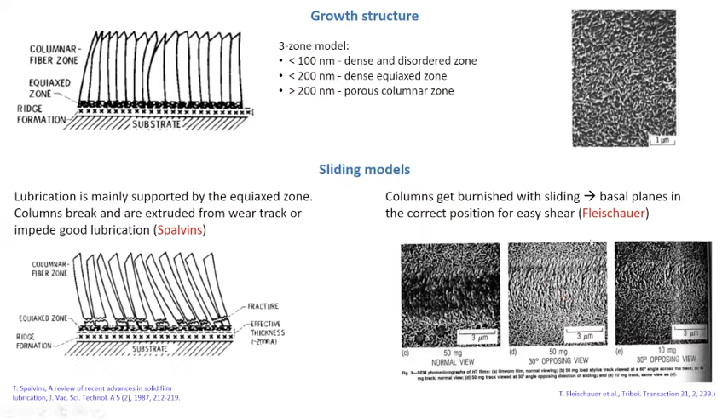Finally, we have another important issue related to MoS2: its failure in presence of humidity. Here again we have two hypotheses—I'll call them the old one and the novel one.

The old hypothesis proposes that the presence of humidity induces oxidation of the material, in particular the generation of MoO3, which is an abrasive material, and the generation of these oxides induces progressive failure of the coatings in presence of humidity.

But other researchers, around the middle of the 20th century, proposed another explanation, because they observed that the coefficient of friction slightly decreases as the temperature of the substrate increases.

They explained this experimental evidence by supposing that water molecules can physisorb and diffuse into the bulk, sticking to the edges of the basal planes, and so impeding the lamellar easy shear.

Actually, there is no consensus related to these two hypotheses. Somebody states that it's the oxidation that induces the failure of MoS2; others state that it's the physisorption of water molecules.

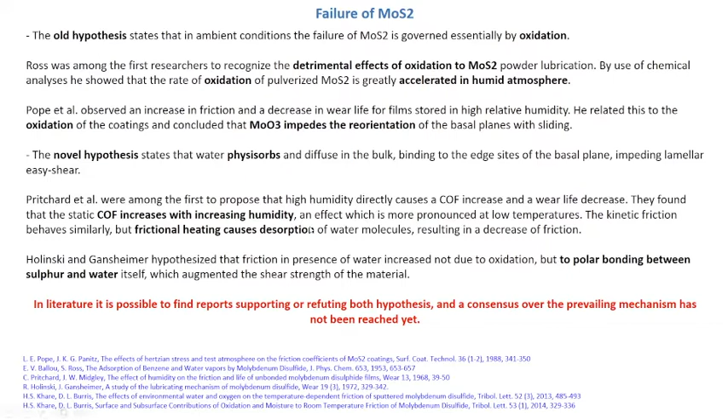So our intent is to understand more about the fundamental mechanisms related to the friction properties of MoS2, and in order to do that, we deposited very thin films of MoS2 on a single crystal.

We chose to deposit 200 nanometers of MoS2 in order to avoid the growth of the columnar structure, so we could see whether it is effectively the presence of the equiaxed zone that supports lubrication, or the presence of the columnar structure.

We also wanted to clarify the role of water physisorption, to see whether it is physisorption or oxidation that induces the failure of MoS2.

We selected silicon as a substrate because, in the form of a single crystal, it presents a very flat surface, so we can avoid the effect of surface morphology. In addition, silicon is not a contaminant of MoS2, so we can be sure there is no effect of the substrate on the chemical characteristics of the coating.

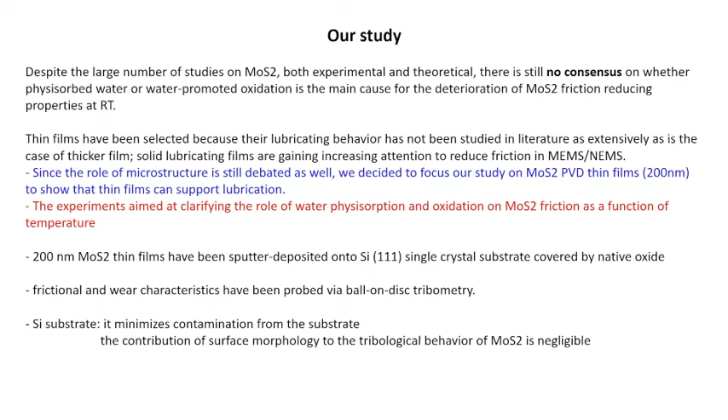Okay, in order to generate this film, we use the physical vapor deposition magnetron sputtering technique. Here you can see a sketch of the machine. The material is deposited in a vacuum chamber where you have the target, which is composed by MoS2, and the substrate in the top part of the chamber. Inducing a plasma and a sputtering of the plasma on the target, you have the generation of a flux of molybdenum and sulfur atoms towards the substrate, and the condensation on the substrate generates the final film.

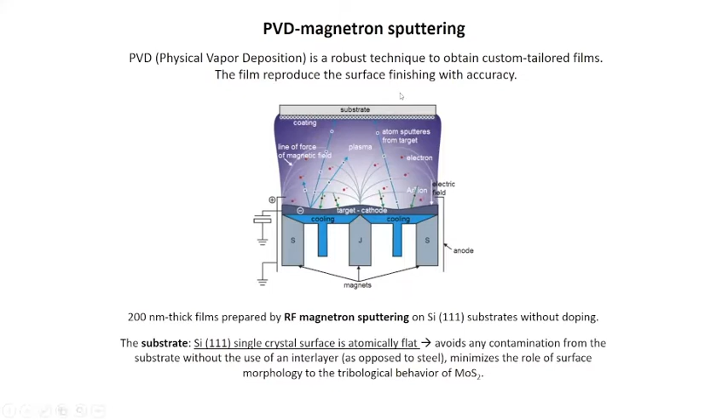Here you can see the appearance of the coating that we have made. In the top view, you can see that there are no evidence of needle-like structures, and this is evident from the top, but also from the cross section. There are no evidence of columns, and so more or less we are in the so-called equiaxed zone.

By means of Auger spectroscopy, we also characterized the stoichiometry of the film, and looking at the table, you can find that the film is stoichiometric. We have a small amount of oxygen, which is related to partial oxygen inside the chamber, but looking at the chemical spectra from the Auger spectroscopy, we may say that oxygen in this case is residual oxygen inside the chamber.

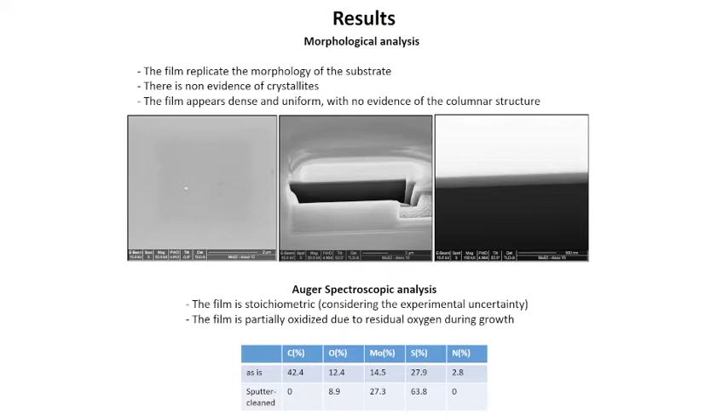Related to the tribological performances, we measured the coefficient of friction as a function of the sliding distance by means of a ball-on-disc tribometer. Here you can see the main characteristics of the test. I just want to highlight the fact that the counterbody is made of steel, 100 chromium 6 steel, and the ball has 4 millimeters in diameter.

The tests have been performed in 3 different conditions: humid air at room temperature, the green line; dry air at room temperature, meaning absence of humidity but presence of oxygen, which is this light blue; and absence of humidity and absence of oxygen, so in nitrogen atmosphere at room temperature. Finally, we also tested in humid atmosphere, but at a slightly higher temperature with respect to room temperature.

The results show that if you do the measurements in humid air, you have a coefficient of friction which is around 0.15, and the failure is reached at about 10-12 kilocycles. When you move to dry air, you have a very important decrease of the coefficient of friction, now around 0.05, 0.07, and the failure in this case has been reached at about 15 kilocycles.

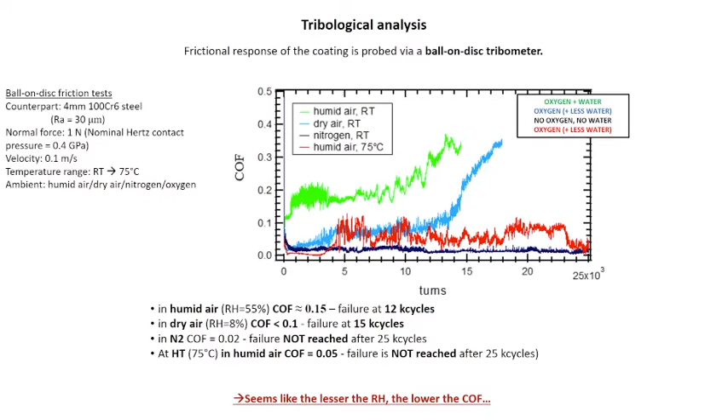In order to deepen these aspects, we repeated similar experiments. In this case, we checked the coefficient of friction and also the appearance of the ball counterbody at different temperatures. So we start at room temperature, we move to 40 degrees, 55 degrees, 75, and then back to 55, 40, and room temperature. So we did a cycle in terms of the temperature of the coating.

What you can see is that the coefficient of friction started at 0.1, and then it drops to 0.01, 0.02 at the higher temperature. Then we restore again the initial value of the coefficient of friction when we go back to room temperature. More or less the same results can be observed qualitatively if you look at the ball counterbody, because at room temperature you have a very large amount of debris on the counterbody.

The debris disappears as soon as we heat the substrate, at 40, 55, 75 degrees. And when you go back to room temperature, again we found this very big amount of debris. This means that the process of heating the substrate induces a reversible process.

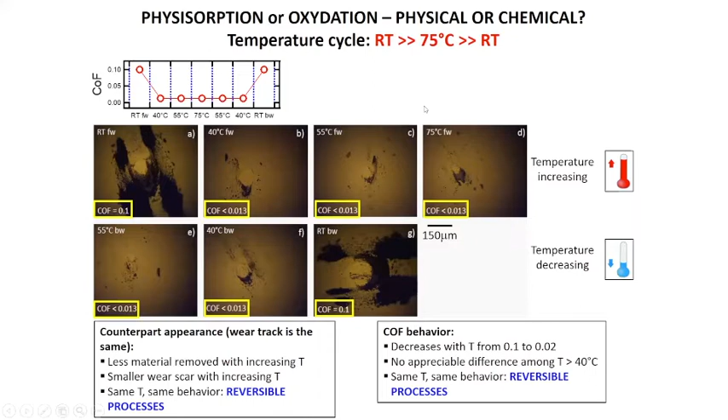So still we are supporting the thesis of water physisorption and not oxidation of the coating. But the final test, which represents more or less the smoking gun about this topic, is what we call the pump and purge experiment. So we measure again the coefficient of friction as a function of the cycle time.

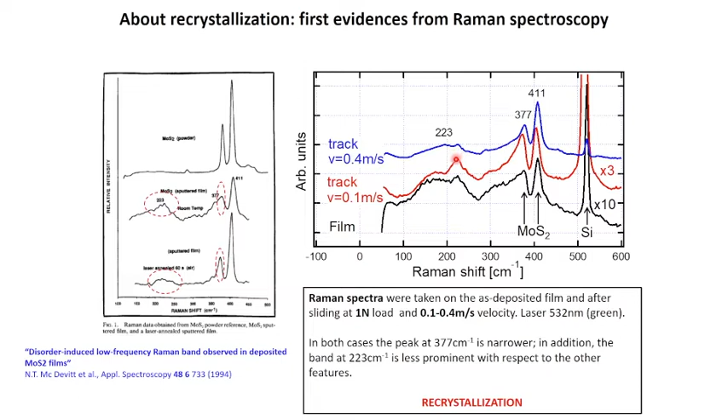In the case of 0.4 meter per second, we also observe a decrease in the broad feature related to 223. This is the first evidence of recrystallization of the coating, which probably has a role in the performance of the material.

Again, still using Raman analysis, we want to deepen the aspects related to the measurement in air with respect to the measurement in vacuum. Here I reported the images you have already seen related to the measurement in air at 1 Newton load, where you can see the presence of debris. These debris are really not adherent to the substrate, because gently cleaning the surface, you can see the complete removal of this debris.

Before cleaning the counterbody, we perform a Raman analysis on this region where the debris are present and on the wear scar. What we obtain is reported in this graph, where the green spectrum corresponds to the region with the presence of debris, while the blue spectrum represents the analysis on the wear scar, in the middle of the wear scar.

As you can see, the debris are composed of molybdenum disulfide, where there is no evidence of the oxidized layer, which has a feature around 800 centimeters to the -1. It is possible to see the generation of the debris if we irradiate with a higher power in the Raman analysis, because in this case you can see the growing of this new structure, which is related to the oxidation of the coating.

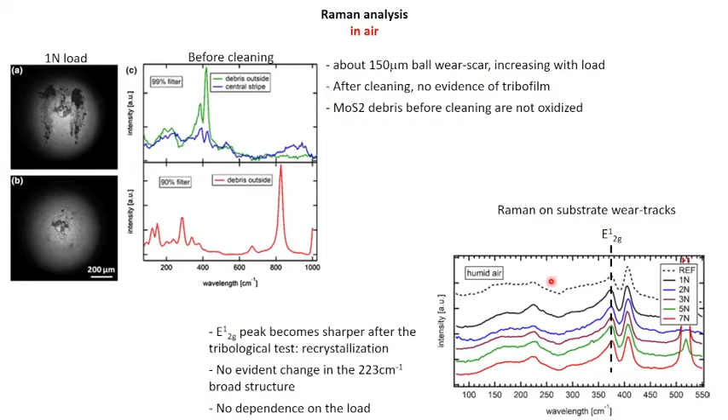Repeating the same analysis in vacuum, even before cleaning the surface, we do not have any evidence of debris on the surface, but we can observe the presence in the wear scar of a dark area. Doing the Raman analysis on this black part, using the higher power that on the debris generates oxidation, you can clearly see that here in red we have the presence of the MoS2 film. So we have the generation of a tribofilm composed of molybdenum disulfide, which is probably the reason for the low coefficient of friction experienced in vacuum or in absence of humidity.

Again, we analyzed the order of the film, still analyzing this feature in the Raman spectra at different loads. Again, we found that this peak gets narrower, and also in this case we did not find any dependence on the load, but the recrystallization seems to be more effective in the case of measurement in vacuum with respect to the case of measurement in air condition. This probably contributes also to the best behavior that has been recorded in absence of humidity.

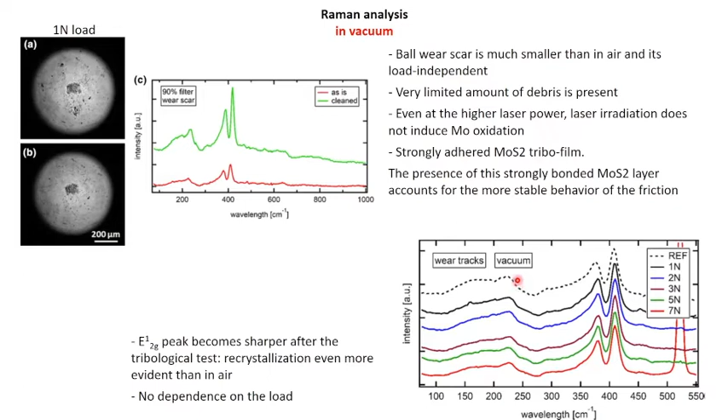Considering the results that we found at the macro scale, we wanted to deepen the aspects of the intrinsic friction mechanism. In order to do that, we have to move to the nanoscale. So we measure again the tribological properties, but applying lower load and with smaller contacts, our area of contact.

So we use AFM. In order to study the role of order and disorder of the coating, we select two different samples. One is the crystalline MoS2, the mineral molybdenite, and the other is a quasi-amorphous MoS2, our polycrystalline coating.

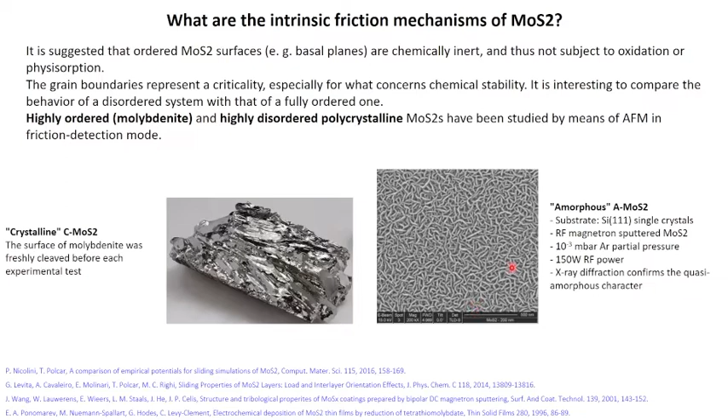In order to measure the tribological properties, we use AFM, but as we saw, the best performances have been found if the two surfaces that slide are both made of MoS2. In order to have this condition again, we cover standard AFM tips with 100 nanometer MoS2 by means of PVD. Here you can see the AFM tip covered by MoS2, where you can clearly recognize the needle-like structure.

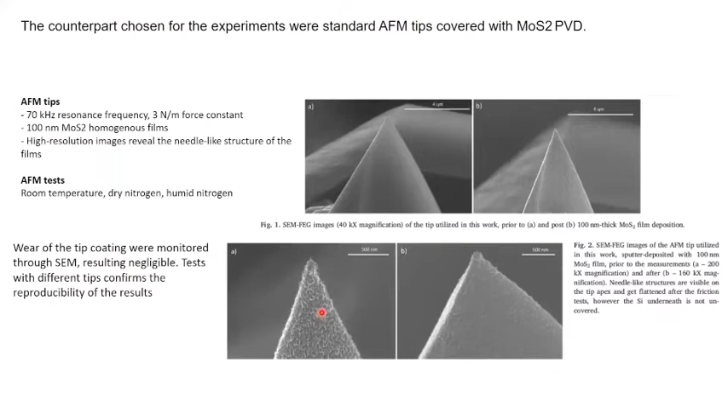So we use this kind of tip and we measure the coefficient of friction. In order to do that with AFM, what you have to do is measure the lateral force as a function of the load. Of course, the slope of the resulting curve represents the coefficient of friction.

So we did this experiment for amorphous coupling, our tip against the polycrystalline film, and in the case of amorphous-crystal coupling, our tip against the molybdenite. We did the experiments in absence of humidity, the red curve here, and in presence of humidity, the blue curve. The results after averaging all the data are reported in the table.

In the case of amorphous coupling, the coefficient of friction in dry condition is 0.41, and in humid condition is 0.58. This is more or less similar to the trend we found at the macro scale, but very different in terms of absolute value. In particular, the difference from dry to humid condition is very different, but this is probably related to the fact that from the macroscale to the nanoscale there are many differences related to the materials, the different load applied, the different area of contact, and others. These are probably the reasons for the different behavior at the nano and macro scale.

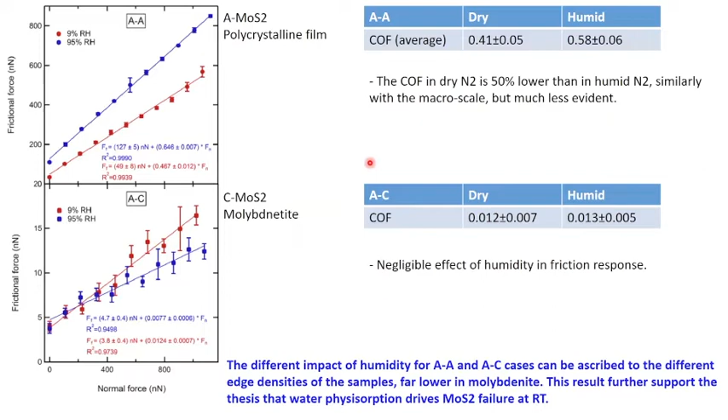In order to better understand the physical mechanism, we also performed an MD simulation thanks to the collaboration with the group of Professor Polcar at the University of Prague. I'm not really an expert in molecular dynamics simulation, so I don't want to go too much into detail on these aspects.

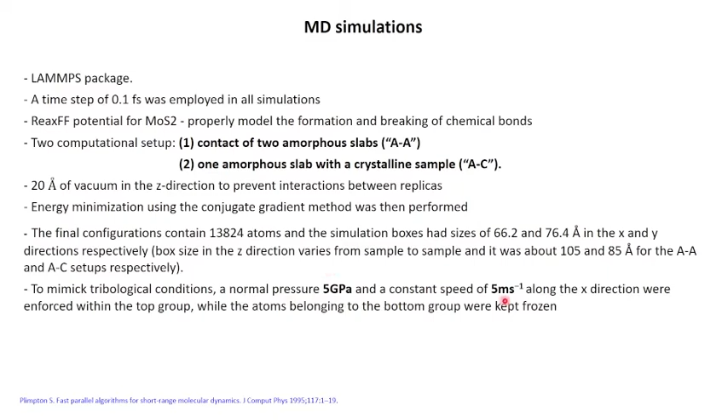I just want to highlight that the MD simulations were done using the contact of two amorphous slabs for the amorphous coupling case, and an amorphous slab versus a crystalline sample for the amorphous-crystal coupling case. The load applied was 5 gigapascals, and the velocity was 5 meters per second.

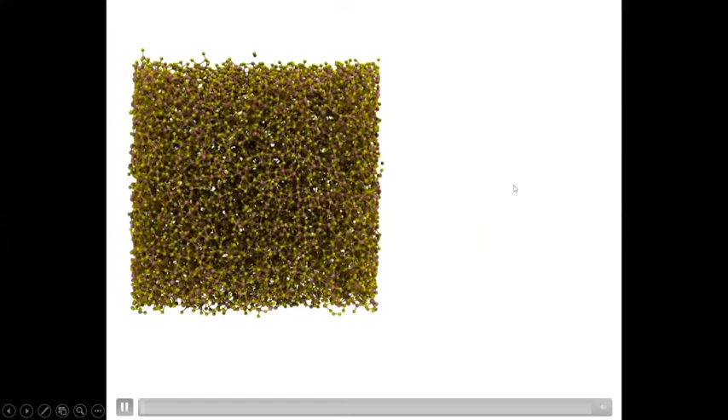If we look at this video here, this is for amorphous coupling. You can see that the application of the force only generates deformation of the structure, and of course this means that the coefficient of friction is far higher compared to the other case.

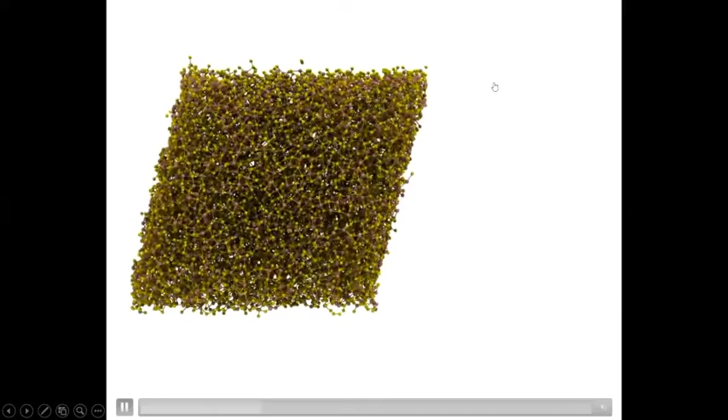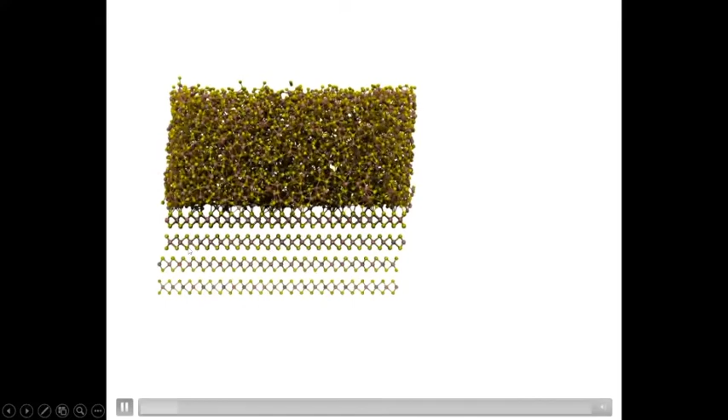If we move to the other video here, you can see there is the stick-slip, in this case of the second plane with respect to the third. And again we have another slip event of the first layer with respect to the second, and so on and so forth.

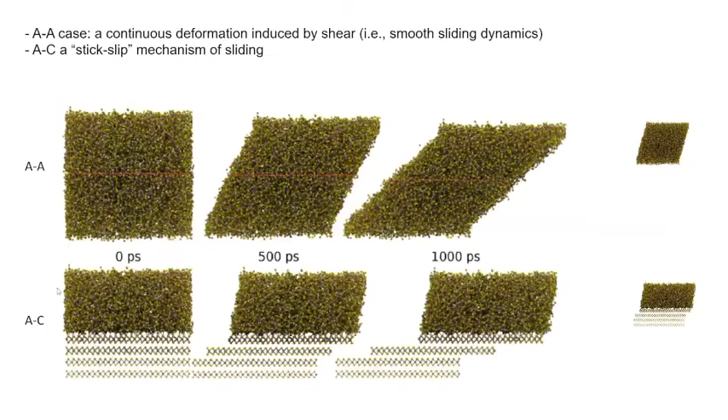So also in the case of the simulation, we can generate this frictional force as a function of the load, and again we can calculate the coefficient of friction in the simulation for the amorphous and amorphous-crystal cases.

In this case, we are only able to do this in dry conditions, in the absence of humidity. The comparison with the experiments shows that for amorphous coupling, we have a perfect agreement between simulation and experiments. For amorphous-crystal pairing, the coefficient of friction is again lower than for amorphous, even though the difference with respect to the experiments is much higher as well.

So in order to understand this, we have to make some considerations. Regarding the difference in the coefficient of friction between dry and humid atmosphere, I've already told you this is related to the very different experiments. And regarding the difference in the coefficient of friction between, let's say, dry nitrogen in the single crystal case, we have to consider that in crystal coupling, during sliding the process is only related to overcoming the van der Waals forces.

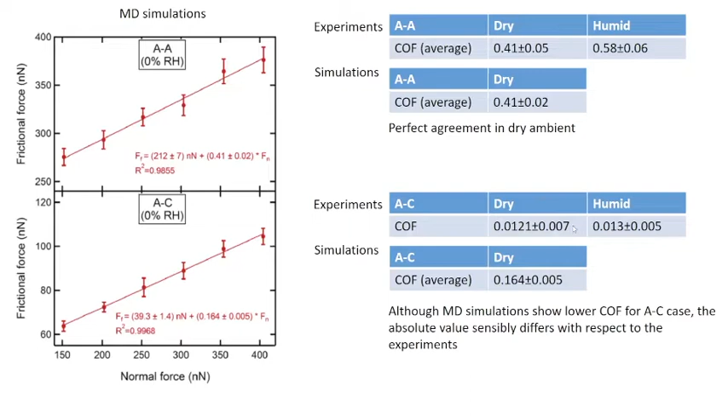Regarding the difference between these values, this has been ascribed to the fact that in the molecular dynamics simulation, the model assumes commensuration between the sliding planes. So this is the most dissipative scenario, which is not the case in the experiments, since we cannot control exactly the orientation of the crystal.

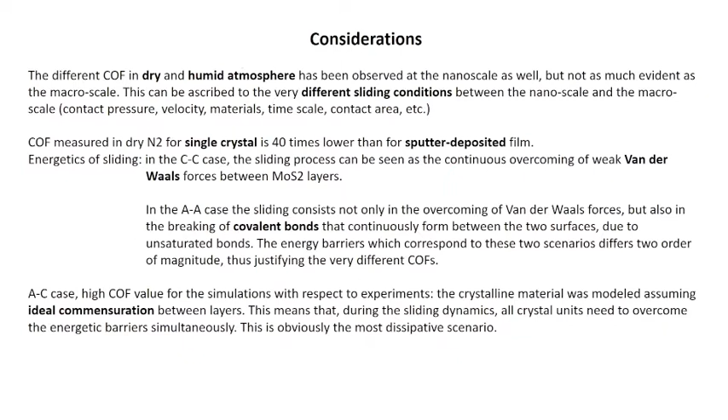Okay, let's do some general considerations related to the work on this particular system.

What I showed you is that 200 nanometer films are able to support lubrication despite the absence of the columnar structure, and this, in a way, supports the sliding model from Spalvins.

Heating to a temperature sufficient to induce water desorption, you can have very good tribological performance even in the presence of humidity. This suggests that oxidation is not the main origin of MoS2 failure.

This has also been proved by measuring the coefficient of friction in saturation of oxygen, which shows that even if oxygen is always present in the ambient, we do not get worse tribological performance of MoS2.

We also found that in the absence of humidity, we have the generation of a tribofilm which is very strongly adhered to the surface, and this is probably the reason why, in absence of humidity, we have this very good tribological performance of MoS2.

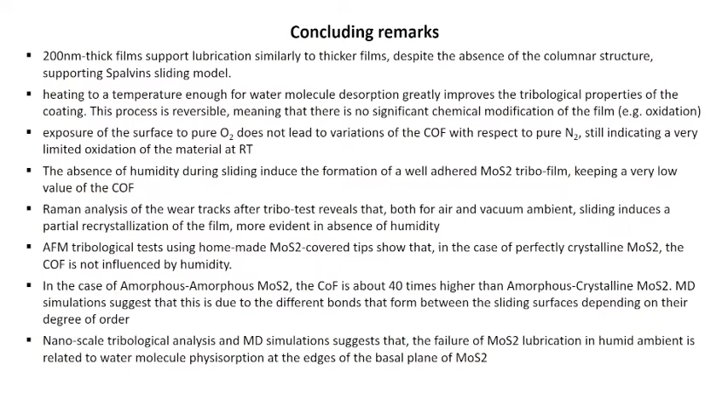Finally, I would like to thank some people. First of all, Dr. Elisabetta Serpini, who is the main author of this work related to MoS2, and the group of Professor Polcar at the University of Prague for the productive collaboration on MD simulation and many other issues related to these aspects.

For those who want to deepen their understanding of these issues, you can look at this publication from our group and the group in Prague, where you can see in more detail what I have already shown. And of course, thank you for the attention.

Thank you very much for the presentation. I think it was very complete, starting with the basics of the theories related to MoS2, going over a lot of experimental insights, and then closing with molecular dynamic simulations. It was not just a talk, it was a lesson to learn about MoS2—at least for me, I learned a couple of new things since I'm not working with MoS2.

So thank you very much for that. I think we have one question from the audience we can address right away: what is the example of amorphous and crystalline phase coupling? Can we call a 2D material amorphous and a ferrite phase crystalline?

So we have to find alternatives. This has been presented before in different research groups all over the world - there are a lot of people working in that field, a very fascinating field. The most promising or most famous candidates, as I said before, are MoS2, graphite as the traditional material, and of course tungsten disulfide, which has some advantages but also some drawbacks that I will discuss in a minute.

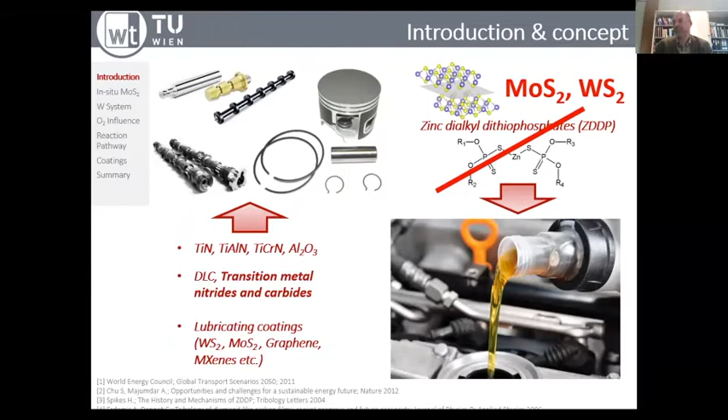If you think about how you can actually form these kinds of protective layers, there are different ways how you can apply that - sputtering techniques, PVD, CVD, different ways how you can actually apply MoS2 or WS2 to surfaces. One interesting aspect is whether you are able to form them in situ, under the operation given by the load, the temperature, and the tribological system involved.

And if you want to do that, of course, you need first of all a molybdenum or tungsten delivery system - that's the first thing you need. Either you use them as a bulk metal, which is maybe not so attractive for applications, or you make a thin coating on top of the respective surface as your delivery system.

Then, on the other hand, as we are talking about MoS2 and WS2, you need a sulfur delivery system. Where does the sulfur come from? The sulfur mainly can come from the lubricants that we still need, first to carry the load and transfer the momentum, but also to carry heat away. The oils and lubricants in general have many other functionalities that I will not discuss in detail now. But basically, if you look at a lubricant, it has different additives inside that already implement sources of sulfur or phosphorus or something else.

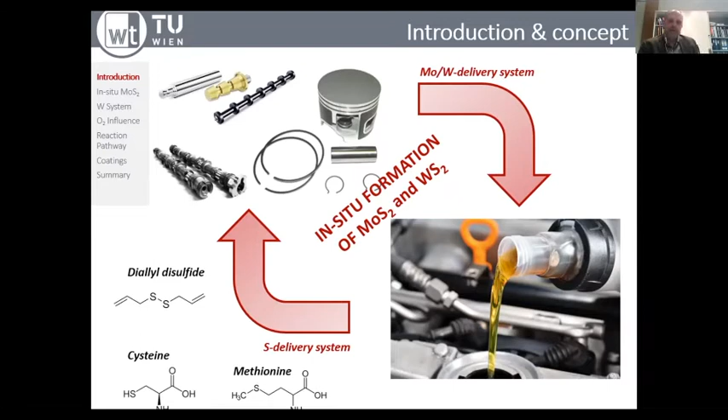Apart from the EP additives that you can find commercially available, you may have heard that in this field everybody wants to get green now, and we are tackling a lot of these environmental concerns. There are also, by nature, more environmentally friendly sources of sulfur, like diallyl disulfide, cysteine, or methionine. So you can find in nature some of these sulfur sources that are more environmentally friendly.

And that can be used - I will not discuss them today. There is also a very nice publication by my colleague, Dr. Manel Rodriguez-Ripoll, who has done quite a lot of work in that field and published how these additives can be used. Today, we will concentrate on a commercially available sulfur source.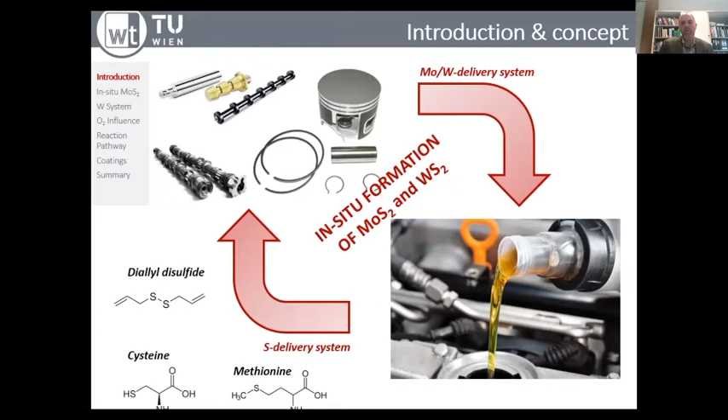It's a commercial Lubrizol EP additive that has been added to a polyalphaolefin 8 synthetic oil, and I will show you what we did.

So first, the idea was this is an overview sketch of the in-situ generation of these tribofilms. I will come back to this during my talk, step by step.

The basic setup that we selected is a ball on disc setup under unidirectional sliding, with a sliding speed of 0.1 meters per second. As I said before, we have a polyalpha olefin lubricant used as a synthetic lubricant with an EP additive as a sulfur source, and the additive concentration has been varied from 0% to 5%, and all the tests have been done at elevated temperatures up to 100 degrees C.

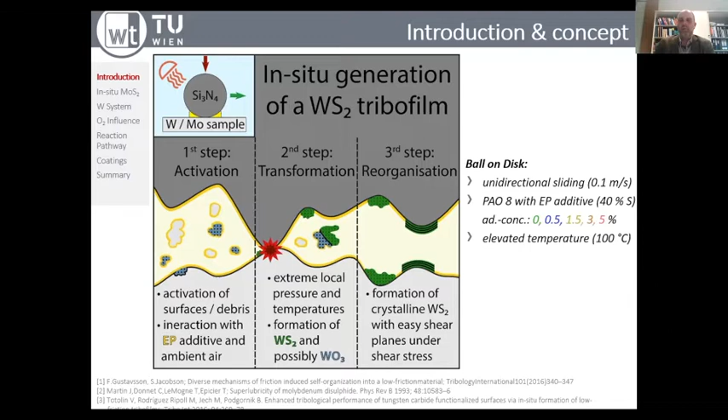When we start with a very simple reference test, we say okay, the reference is a bulky molybdenum sample, and we take as the counterbody a silicon nitride ceramic ball. We selected silicon nitride because it's much harder, it's inert, not reactive to the molybdenum sample. And we start doing our test.

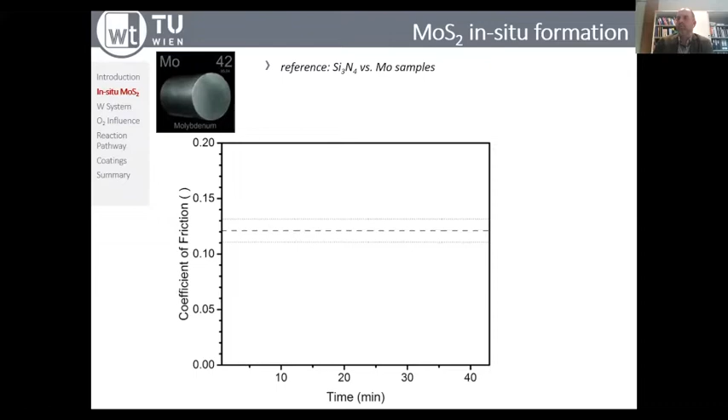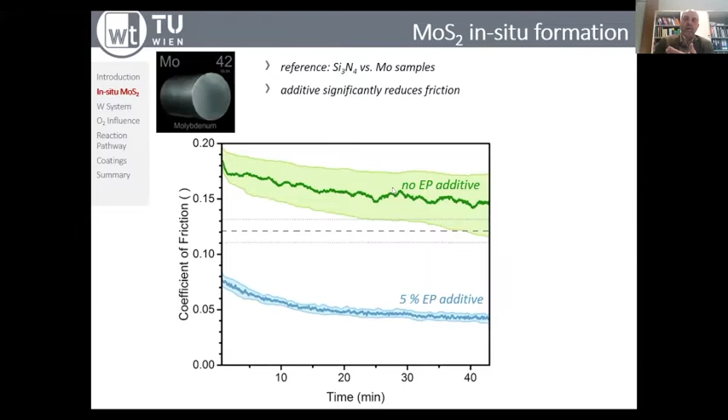You can see coefficient of friction versus time, and then step by step you are adding. On the one hand, you're looking at the situation where you have no EP additive at all. On the other hand, you are looking at the situation where you can find 5% of an EP additive. And it's rather remarkable to see what happens if you add 5% of an EP additive - the friction coefficient drops down significantly by just adding 5% of the sulfur source.

On one hand, we have very high wear. On the other hand, we have nearly no measurable wear. You can even see that for the situation with no EP additive, there's a lot of oscillations and fluctuations in the frictional signal. Whereas for the blue curve, for the 5% EP additive, apart from the fact that we do not really measure wear, the curve is rather smooth and there is not so much oscillation.

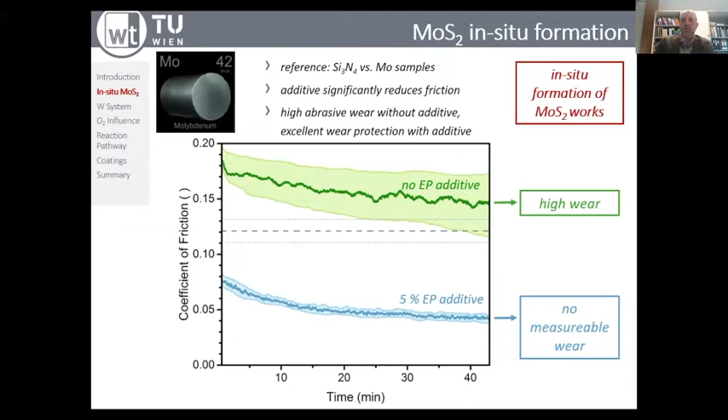So basically, the formation of MoS2 under these conditions is working. And now the next question was, okay, if it's working for molybdenum, how does it behave with tungsten? Tungsten, especially tungsten disulfide, as I mentioned before in the introductory part, has some benefits - it's more stable in terms of temperature, it has higher temperature stability, but also the load carrying capacity is enhanced. So we gave it a try.

If you look at what actually happens, maybe just a few comments more on the tribofilm itself and the debris around the wear scar. You can see there is a lot of debris around here. We also did XPS here, so you can detect the sulfur from the sulfides to some extent.

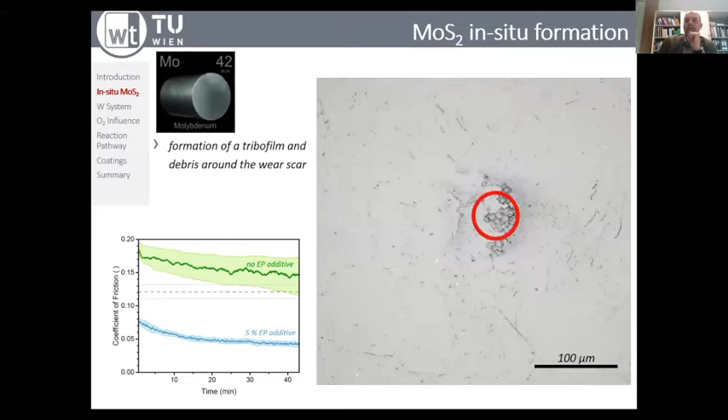Then I said before, okay, what happens if we do the same with tungsten? Can the reaction occur despite tungsten having stronger bonds? It's from the chemical side not as reactive. It's similar to molybdenum to some extent, but you can see when you start adding step by step the EP additive - 0.5, 1.5, 3%, and even 5% - there is a drop in the friction coefficient compared to the situation with no EP additive on board, but it was not as small as we expected.

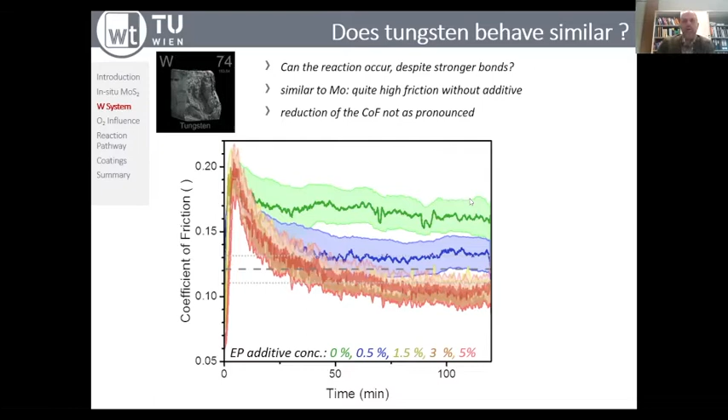When you do the XPS, actually the amount of tungsten oxides is first rather small. Compared to the molybdenum side, where we had a large amount in XPS also of metal oxides that could be identified, for the tungsten system there's only a small amount of tungsten oxides present, and there is no evidence of sulfides in the contact. So obviously something does not work properly. The question is now why?

When you look at the Raman spectra, this again shows you very clearly that for the 5% of the EP additive, you don't see any peaks characteristic for the WS2 in that case.

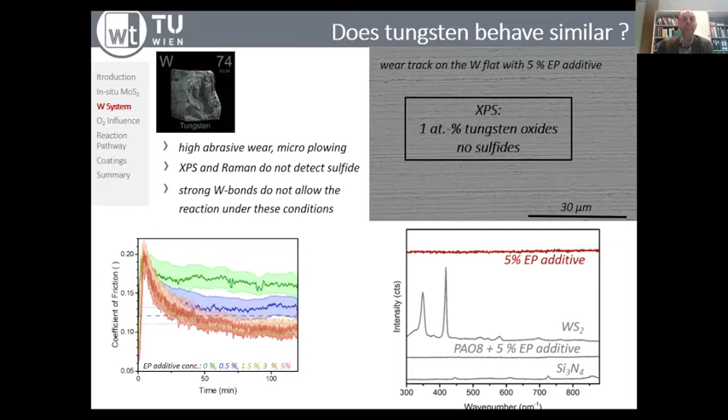So the idea was to say, in the molybdenum system, we found a lot of oxygen and oxides, and in the tungsten system, there was not so much oxide present. Alberto mentioned already in his previous talk that oxygen can have different roles in this scenario. So we tried to say, okay, maybe something is going on with the role or the influence of the oxygen.

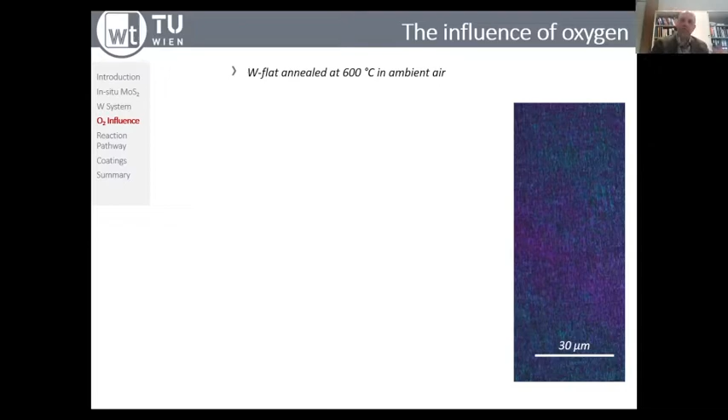So the next experiment, what we did was to take a tungsten flat sample, and we annealed that at 600 degrees C under ambient conditions. Then we created, after 15 minutes of this thermal treatment, a very homogeneous and 500 nanometer thick tungsten trioxide film. So we pre-oxidized the tungsten surface, and then we checked what happens after we pre-oxidized it.

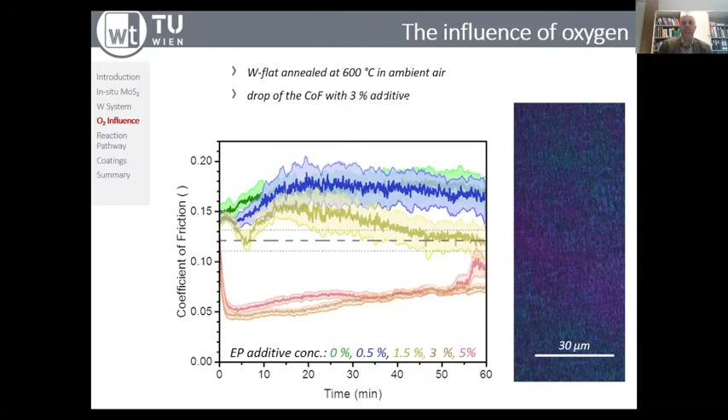Again, we start at 0%, no EP additive present, coefficient of friction versus time. Now we start to add slowly, step by step, the additive. What you see is first nothing happens, but then for higher concentrations, once you reach a certain threshold, there is a significant jump of the friction coefficient down to very low values, up to 0.05, which is rather small. So obviously, when you reach a certain threshold value of the additive concentration, you have a very pronounced drop down in the coefficient of friction. And obviously, this approach of pre-oxidizing the tungsten surface had an effect on that.

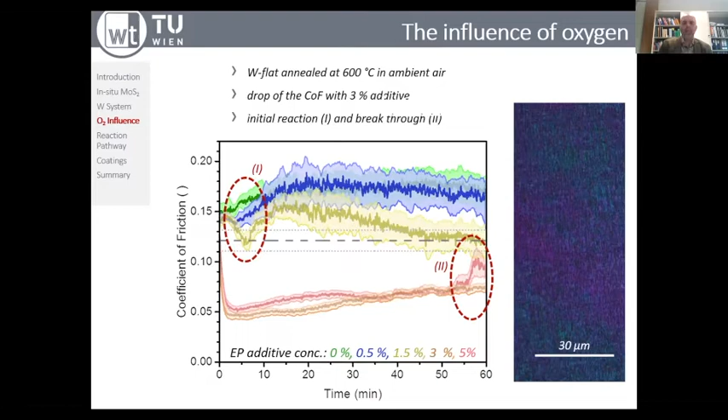Now we have to understand why. There are actually two parts, initial reaction and breakthrough reaction, if we look a little bit deeper at that.

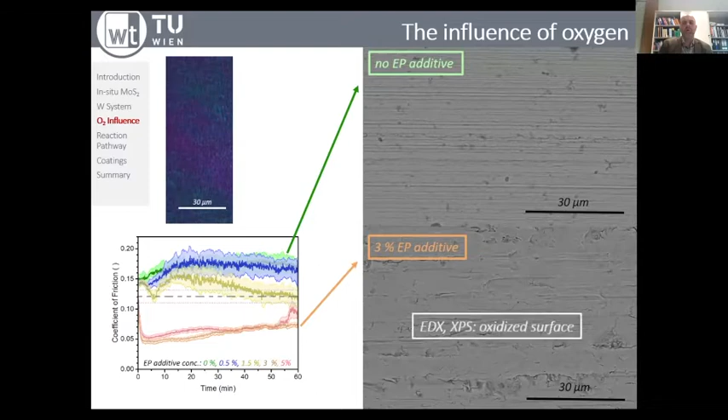Again, you see the wear tracks or micrographs for no EP additive and 3% EP additive. If you then do XPS and EDX on the oxidized surfaces, you can learn quite a lot. Also, if you just look at the ball surface, the counterbody, you can see that without an EP additive there's severe flattening of the ball. If you add already 3% of the EP additive, the ball surface is not flattened, there's much less wear, and we have the significant jump down in the friction coefficient.

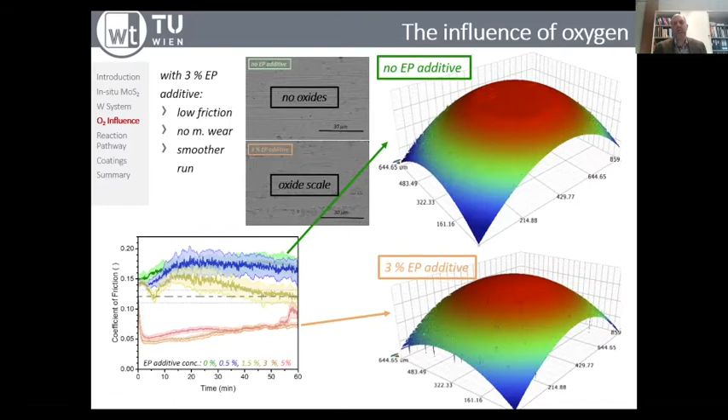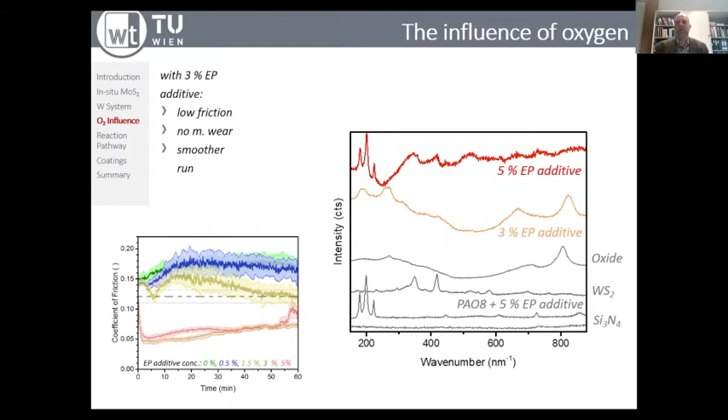When we look a little more at this, we said, okay, now we understand what happens with a pre-oxidized substrate material, tungsten. What would also happen if we start revisiting the MoS2 formation again? So we just exclude the oxygen from the test, and we do that in a dry nitrogen atmosphere.

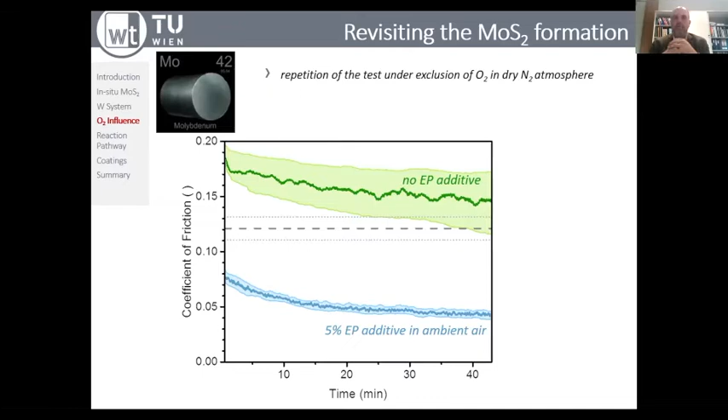Just to remind you, we had the scenario before, no EP additive, and then we added 5% EP additive under ambient air. Once you start doing the test in dry nitrogen atmosphere, you see the coefficient of friction go down, but it is not as low as in the scenario before under ambient air. So there is a significantly higher coefficient of friction, and obviously, as I said before, the oxygen plays a very important role here.

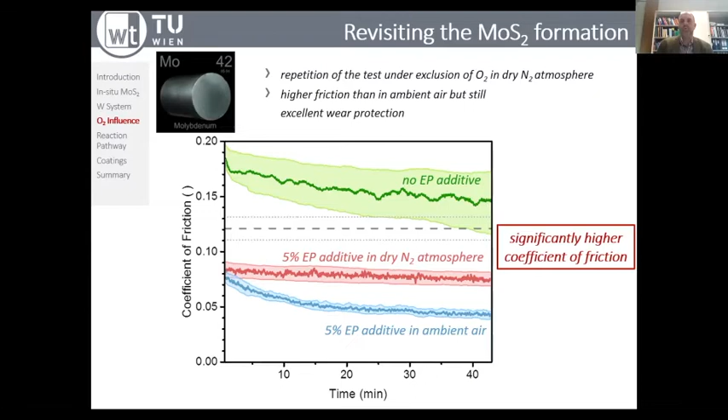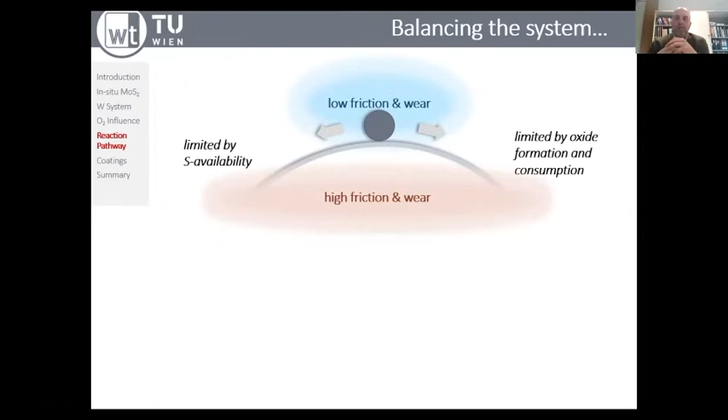So coming to a kind of intermediate summary, it seems like we need a balancing of the system. There is a kind of equilibrium governed by two things. First, of course, we need a sulfur source - we have a limitation by sulfur availability that comes from the additives in the lubricant. On the other hand, we have a limitation by oxide formation and consumption, because when you do the sliding test, you are mechanically removing the tribofilm that is forming, and you also create it again in the contact and replenish the contact again. So you need to find a very defined balance between sulfur as a delivery source and oxidation rate of the material as an intermediate approach, to find the optimum parameter where you can in situ form the molybdenum disulfide and tungsten disulfide, and then tackle the friction and the wear.

So we also tried to understand, okay, how does that go hand in hand? Because we know that the tungsten trioxide is actually rather stable. When you start increasing the temperature, of course, the stability goes down.

So we have a kinetic hindrance in the beginning, but by the interplay of temperature and contact pressure, you might even push the system to a higher stability of the tungsten disulfide, which is not to be expected because usually the metal oxides are rather stable and you can find them predominantly in the contact. But by raising the temperature and also the contact pressure, you can even shift the system. This is clearly proved by the DFT calculations, where you have a region with a more stable tungsten disulfide.

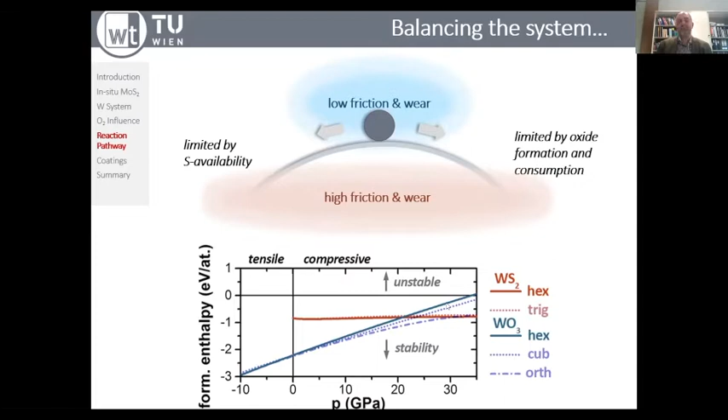So we said, okay, fine, but who is using, by the way, pure tungsten surfaces? No one. Also, there is a problem with the tungsten delivery. We saw that in case of MoS2, molybdenum surfaces more voluntarily form MoS2 in situ. In the case of tungsten, there are some complications, and also in terms of the delivery system of the tungsten, there are some drawbacks.

So we decided to go for tungsten nitride coatings. Why? There are two reasons. The first is that tungsten nitride has a much higher surface oxidation rate, which helps to have this intermediate pre-oxidized state, so that it can actually happen that you form tungsten disulfide. The second point is that tungsten nitride is much harder than the pure tungsten surface.

So we produced tungsten nitride coatings by HIPIMS. We had a hardness in our experiments of 31 gigapascal, and as I said, it was reactively sputtered. We also cross-checked that we actually ended up with the right composition. When you really look at tungsten nitride coatings, with higher hardness and better tungsten delivery due to a better surface oxidation rate compared to pure tungsten, what can you expect?

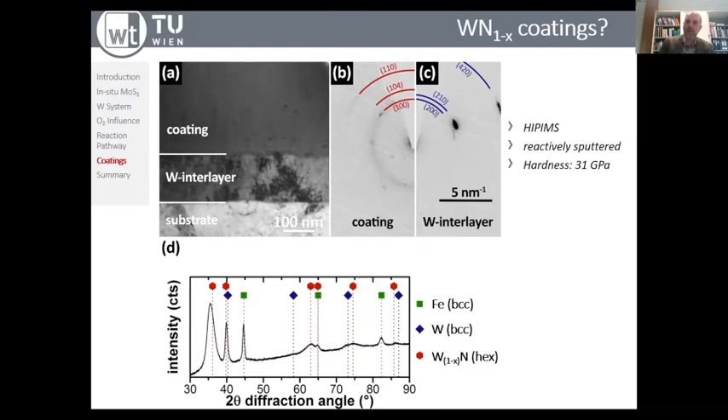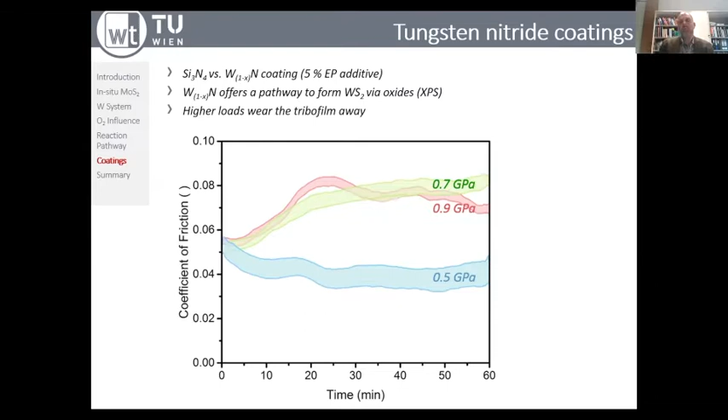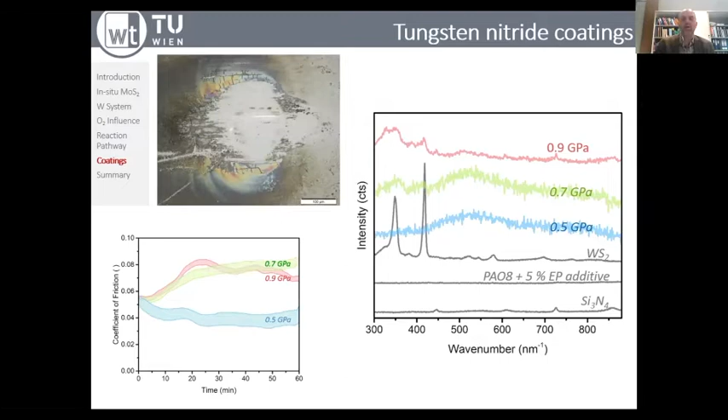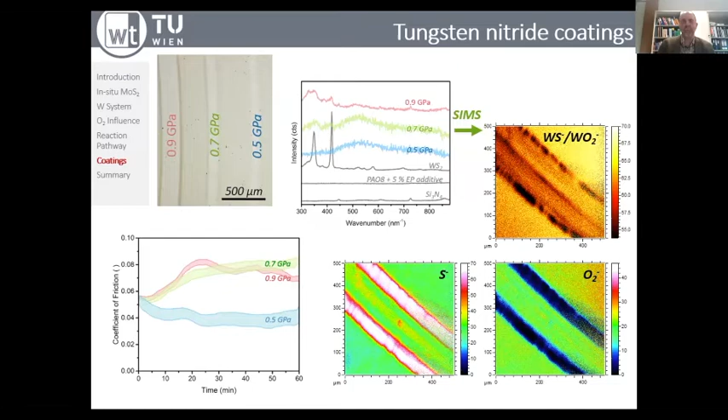If you add the additive, it really reduces, even for higher contact pressures, the wear on the counter body. But as I said, this is one part of the truth.

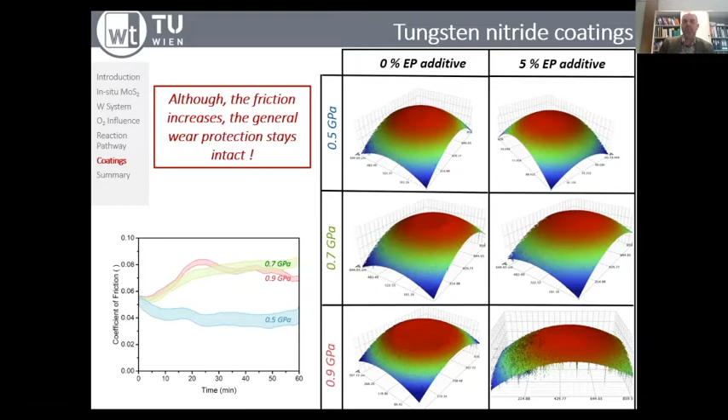One other prerequisite for a working tribofilm is that you have a very nice alignment alongside these lattice planes. And on the other hand, the tungsten delivery and the oxidation process take place before. So this is final proof that in this film we actually found islands of tungsten disulfide, easily proven by the lattice spacing we measured in TEM.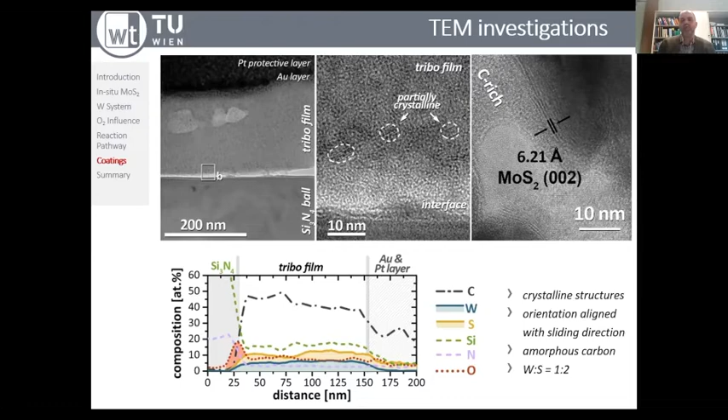To make a summary now: when looking at the in situ formation of tribofilms in these two systems, it highly depends first on having a formation route via oxides, especially for the tungsten. This is decisive. As I showed you, if you don't have a pre-oxidized surface or something with a high surface oxidation rate, you will not be able to form the tungsten disulfide in situ.

You also need a respective additive source that provides the sulfur, and you have to provide the tungsten or molybdenum itself. The final point shown by the TEM investigation is that you need a self-orientation of these partially crystalline forming fragments in the tribofilm that are then subject to shearing — you need all of this coming together to make it work.

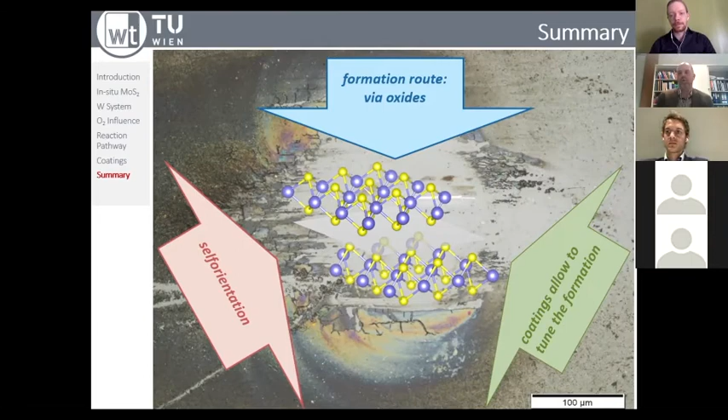I hope, time-wise, it's okay. I hope I could show you that there is a lot still to be discovered in these interesting systems. I would like to thank you for your attention, and I'm happy to take any remarks or questions later on. Thank you very much for your attention.

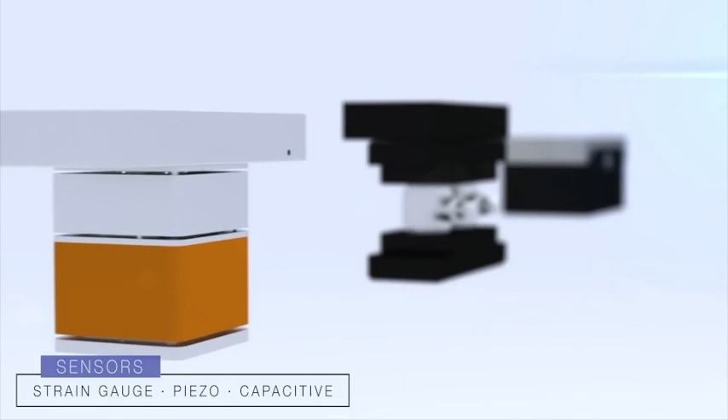Introducing the most advanced universal tribometer, the MFT 5000. With a modular architecture platform design, it is a robust surface testing instrument engineered to evaluate friction, wear, mechanical properties of materials, as well as lubricants over time. The MFT5000's open XYZ stages and wide range of interchangeable modules and sensors allow users to self-implement and add-on customization and combine several tribology tools all on one device. These diverse modules accomplish various motions for any application and are capable of speeds from 10,000 RPM to 500 Hz oscillation. The complementary sensors achieve a force range from millinewton to 12,000 Newton, with options of strain gauge, piezo, and capacitive multi-dimension force sensors.

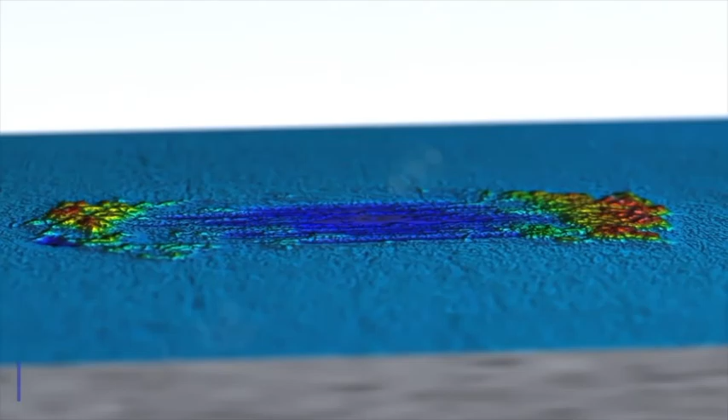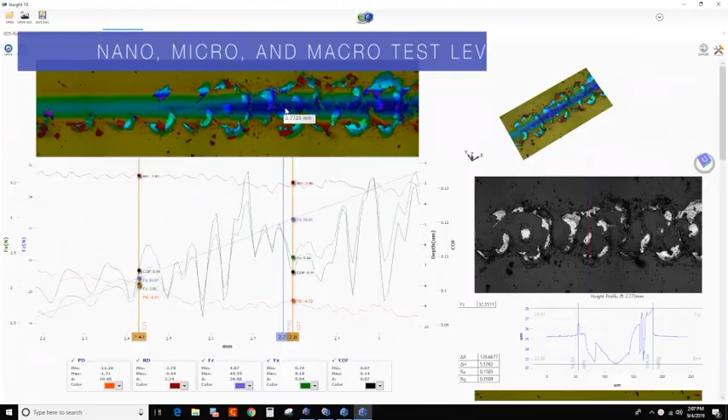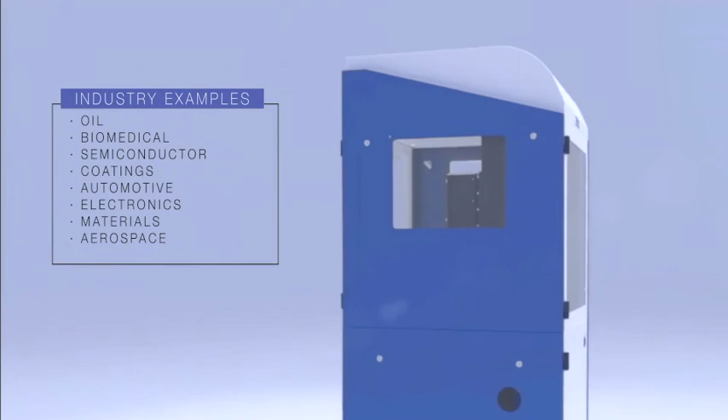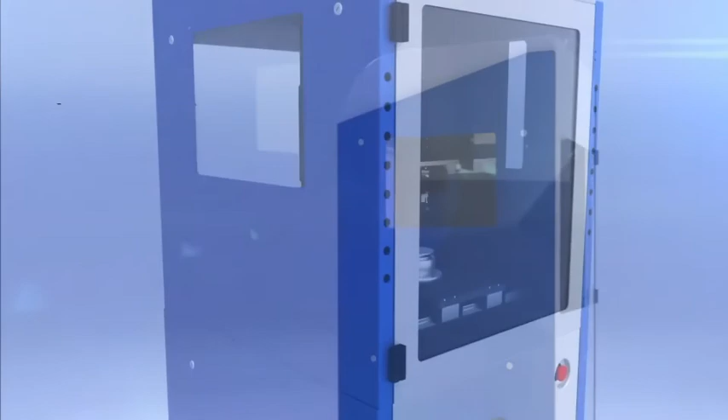The lambda profilometer, combined with the patented inline design, can analyze any surface, including glass, with ease. Because of its unique four imaging modes, the profilometer produces 3D information by creating sub-nanometer surface images automatically. A fully automated and simple software interface integrates the data, enabling researchers to design and conduct tests at nano, micro, and macro levels. To simulate real-life scenarios, the tribometer comes with several environmental control options that allow testing from -120 to 1200 degrees Celsius. These interchangeable chambers are skilled in evaluating high pressure, vacuum, humidity, salt spray, and tribocorrosion conditions. Due to its multiple possible configurations, the MFT5000 is used extensively across a wide range of industries, including oil, biomedical, semiconductor, coatings, automotive, electronics, materials, aerospace, and many more. On this platform, all types of tribology tests are possible. Rtec Instruments, leading innovation in tribology and surface test instrumentation.